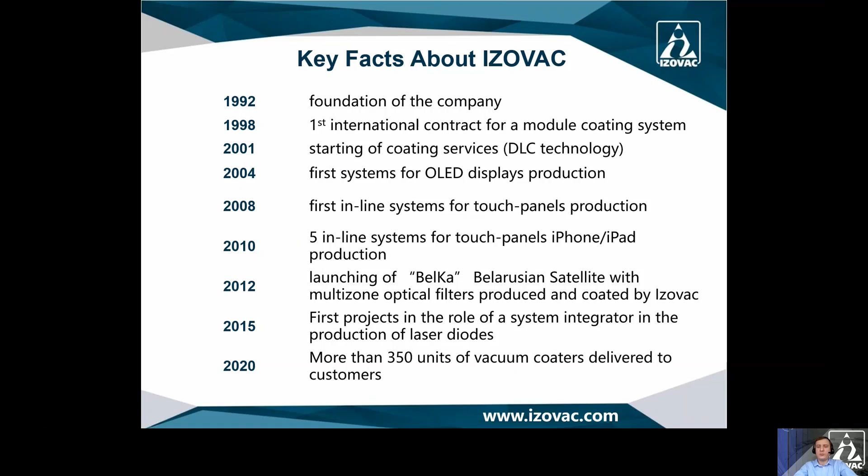Izovac was founded in 1992, has more than 30 years of history, and nowadays more than 350 units of vacuum coaters have been delivered to customers. I worked at Izovac over 20 years, specialized in ion sputtering, ion assisted deposition, ion treatment, and magnetron sputtering. My areas of knowledge are PVD and CVD coatings, R&D planning and implementation, finite elements modeling, ion sources and magnetrons design, project management, process management, production management, and product management.

We are a customer-oriented company. Technological complaints of our customers are our complaints. For the following complaints we would like to introduce our personal solutions for your application, presented here in a table. First: poor adhesion of the functional layer to the substrate.

There are no requirements for radiation exposure to the substrate. In this case, the solution will be surface ion activation.

For etching purposes, where superior surface roughness is required and it is not achieved by chemical or mechanical polishing methods, surface ion polishing will be the solution.

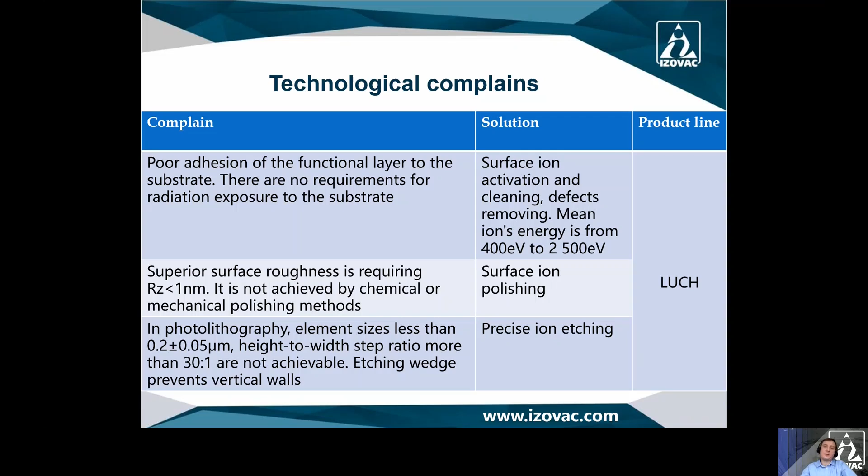In photolithography, element size less than 0.2 microns, with a height to width step ratio more than 30, are not available, and etching wedge prevents vertical walls. In this case, precise ion etching will be the solution from Izovac.

Where inclined orientation of surface roughness is required, inclined ion etching will be the solution.

For porous deposition films, low laser damage resistance, and difficulties in obtaining films with multi-component materials and chemical compounds such as ceramic, ferromagnetic, refractory, and non-conductive complex compositions, high energy ion source sputtering will be the solution.

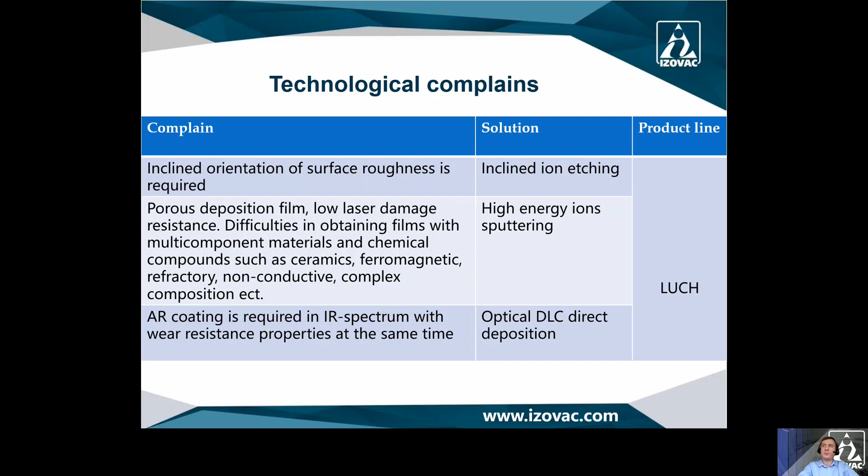The next complaint: where anti-reflecting coating is required in the infrared spectrum with wear-resistant properties at the same time, optical DLC direct deposition will be the solution here.

The ion beam source is intended for substrate precleaning and surface activation to achieve better adhesion of the following condensed thin film layers. The source could also be used for substrate surface etching, straightening, and any material sputtering, not limited to ceramic and magnetic ones. Ion beam treatment of the surface is defined as a certain effect resulting from applying ion beams of a certain character with defined energy and ion density to the target object.

Ions of the working gas are generated within crossed electrical and magnetic fields, and their acceleration and energy result from the difference of potentials within the anode-cathode gap. Ions resulting from working gas ionization, together with drifting electrons within a closed magnetic field, create an anode layer. Devices employing these physical principles are called anode layer accelerators.

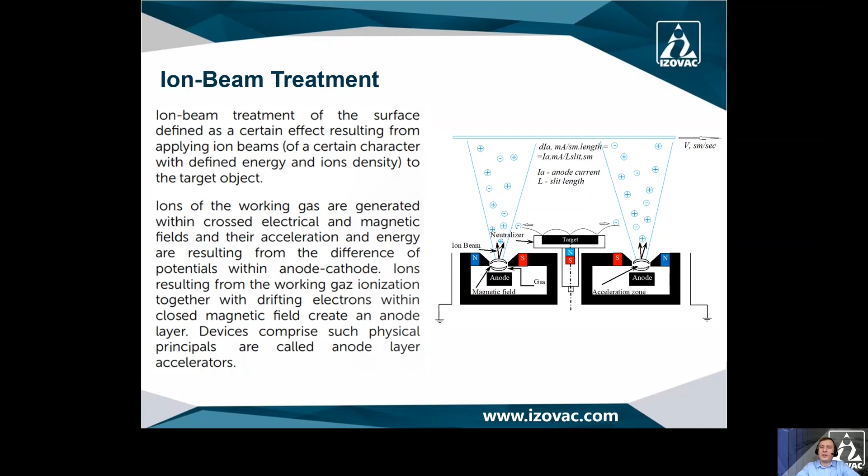Here is a small cross-section of our ion source LUCH represented in the picture, and we can see the main parameters of this source such as ion beam density, ion beam energy, and substrate speed. The main solution for surface activation will be applying our ion source LUCH.

Plasma activation can be performed using various gases. Most of these gases are used to increase the energy of the surface material. The most common way to calculate the surface free energy is through contact angle, or wetting angle. The smaller the wetting angle measured, the higher the surface energy obtained after the activation process.

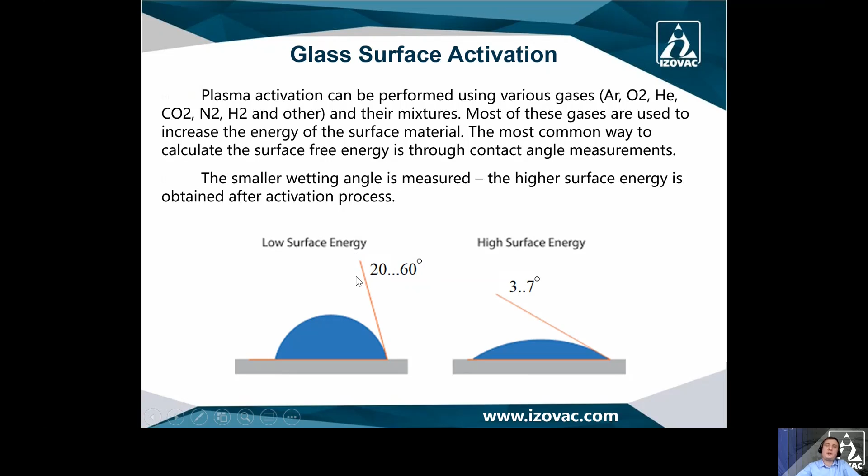We measured the wetting angle before activation and after activation. The conditions of the experiment are as follows: the substrate was moved across the linear ion source LUCH at a distance of about 10 centimeters. Ion current linear density and substrate transportation speed form the bases for ion dose calculation.

The data are represented in the table below. Oxygen was used as the main gas, and soda lime glass was used as the substrate. Here is the dose, ions received on the substrate, mean ion energy in electron volts, and operation pressure.

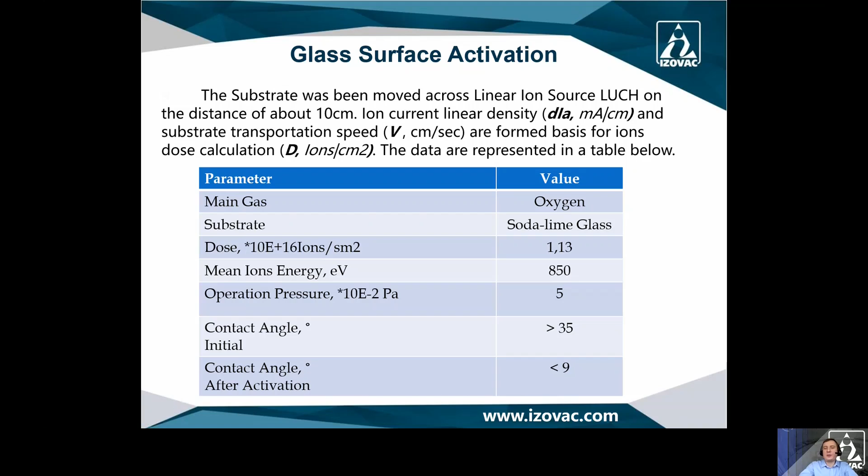Contact angle before treatment was more than 35 degrees. After activation, it decreased to less than 9 degrees. A contact angle as small as 10 degrees is acceptable for most coating applications on glass, but this result could be much improved by increasing ion energy and dose. A contact angle of less than 5 degrees could be obtained as well.

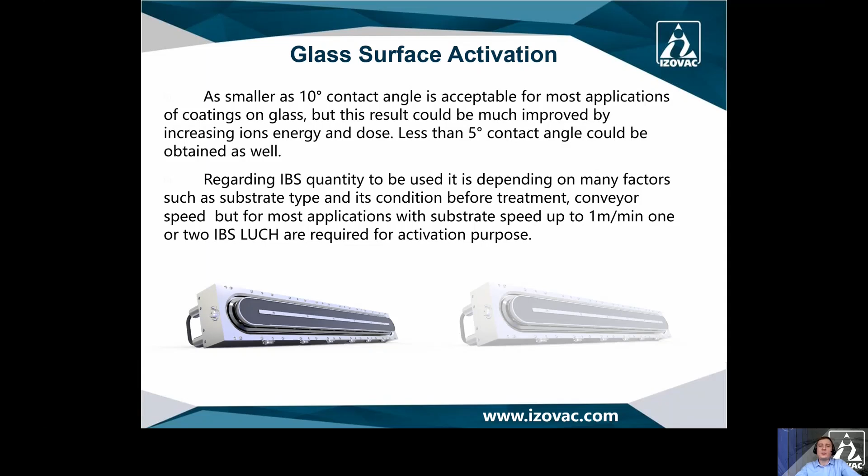Regarding the quantity of ion beam sources to be used, it depends on many factors, such as substrate type and its condition before treatment, and conveyor speed. But for most applications with substrate speed up to 1 meter per minute, 1 or 2 ion beam sources are required for the activation purpose.

Conveyor transportation systems are widely used in mass production. Glass surface during transportation in the production process gets touched by conveyor manipulators, rollers, suction cups, etc. Conveyor imprints appear on the substrate before deposition, which leads to production defects in the following functional layers, finally leading to product defects and company loss.

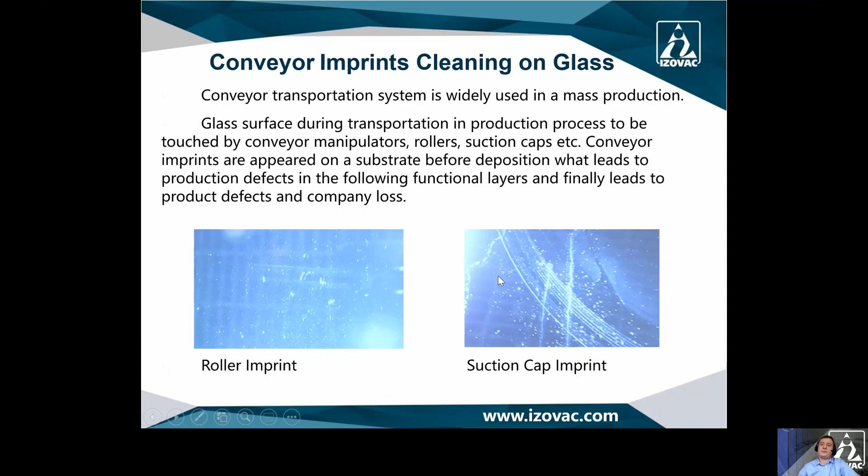Here are some photos of imprints represented, like roller imprints and suction cup imprints. We deal with them furthermore.

Condition of the test: the substrate was being moved across linear ion source LUCH at a distance of about 10 cm. Ion current linear density and substrate speed form the basis for ion dose calculation. The method of calculation of ion dose will be presented below. The test conditions are represented in a table.

Main gas is oxygen, soda lime was used as a substrate. Dose is indicated here, along with mean ion energy and operation pressure.

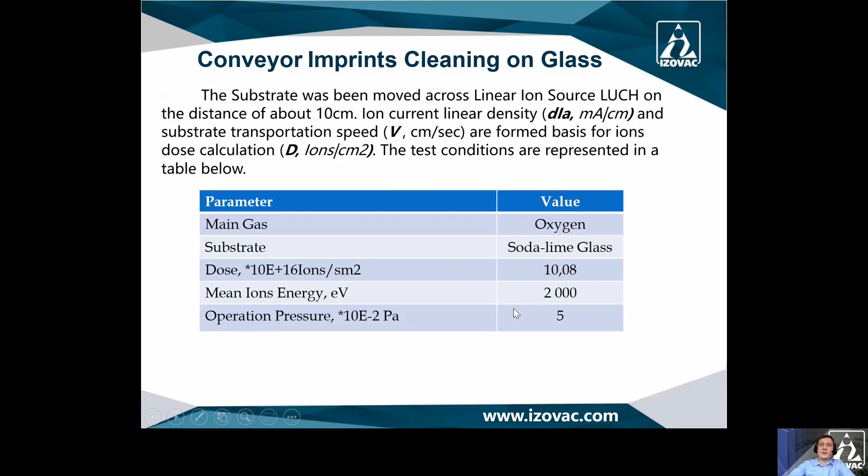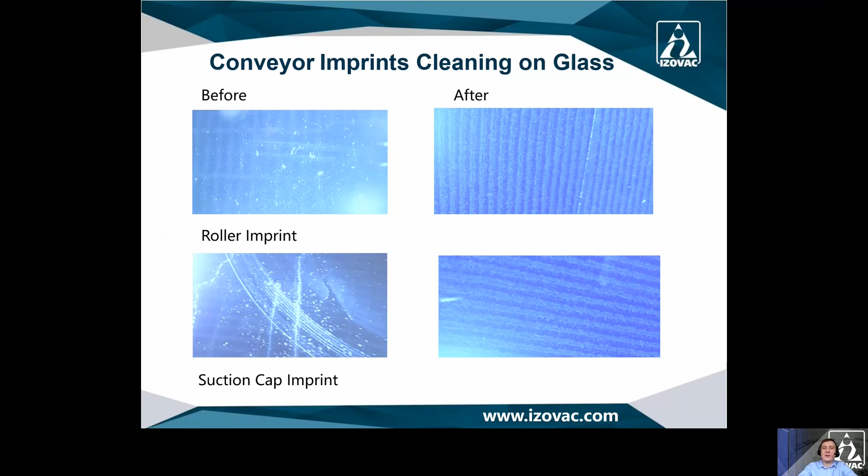What is the result? Take a look at the pictures before and after. You can see after the treatment the glass appears transparent and there are no imprints on the surface.

Conveyor imprints cleaning depends on the material of rollers, grippers and suction cups used. The maximum energy and ion current must be used to shorten the time needed to achieve the necessary ion dose.

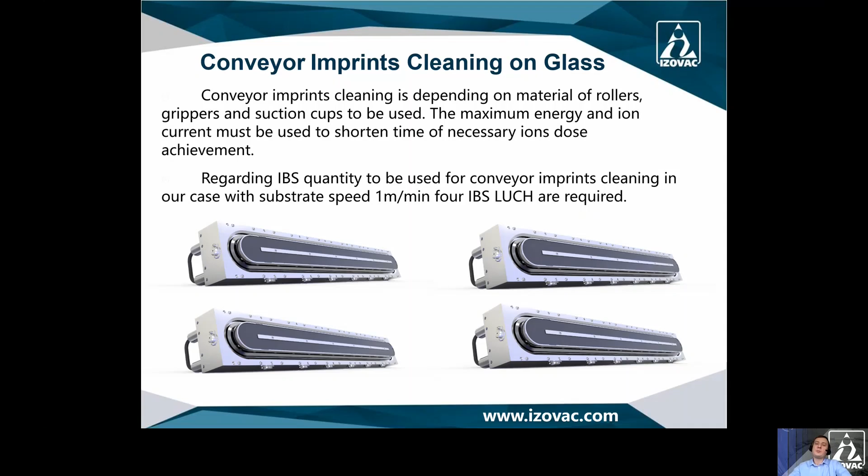Regarding the ion beam source quantity to be used for conveyor imprints cleaning, in our case with substrate speed 1 meter per minute, 4 ion beam sources LUCH are required.

Another application for ion beam source is etching. Thin aluminum foil is widely used in electrolytic capacitor mass production. Roll-to-roll coaters with foil widths more than 1 meter are put into service. Capacitor performance is directly proportional to the capacitor electrode foil surface area and its properties.

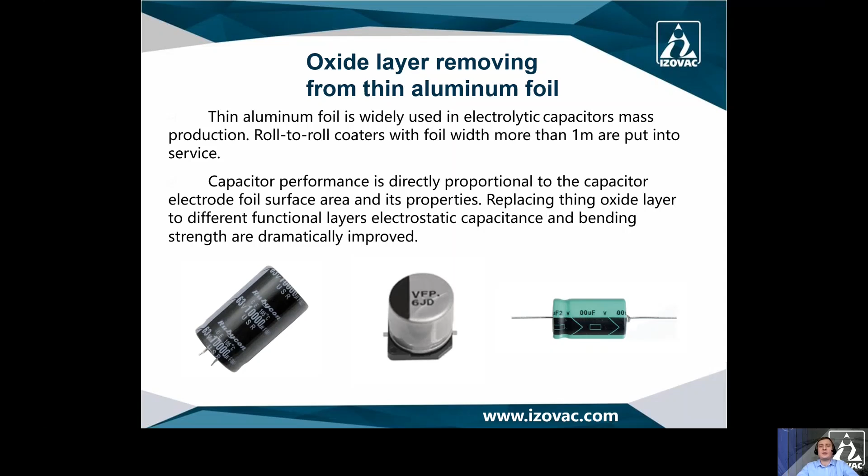Replacing the thin oxide layer with different functional layers, electrostatic capacitance and bending strength are dramatically improved.

Conditions are the same: the substrate was being moved across the linear ion source at a distance of about 10 cm. Ion current, linear density, and transportation speed formed the basis for ion dose calculation. The test conditions are represented in a table below.

Argon was used as the main gas. The substrate was thin aluminum foil, and the etching layer is aluminum oxide. The dose calculation value is indicated: mean ion energy, operation pressure, and etching rate.

When you compare etching rate with ion dose, you can find a suitable solution for your application with different materials, when you know the sputtering coefficient of your material.

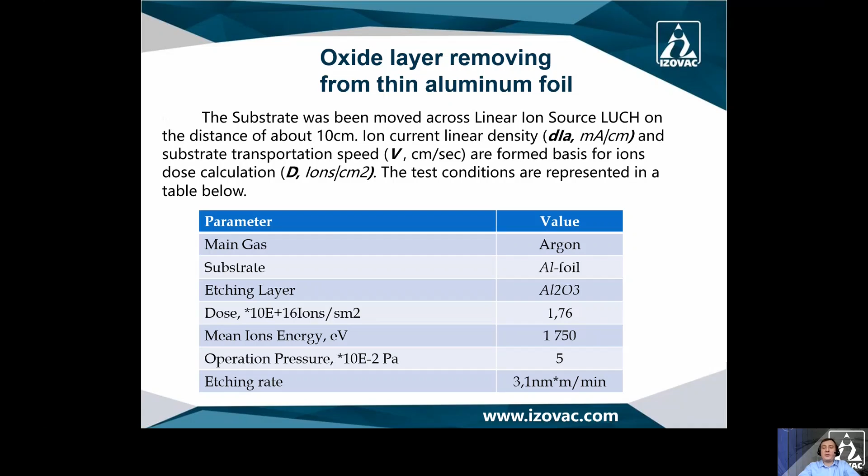Oxide layer etching time depends on thickness and foil moving speed across the ion source used during the process. The maximum allowable energy and ion current could be limited by thin foil possible overheating.

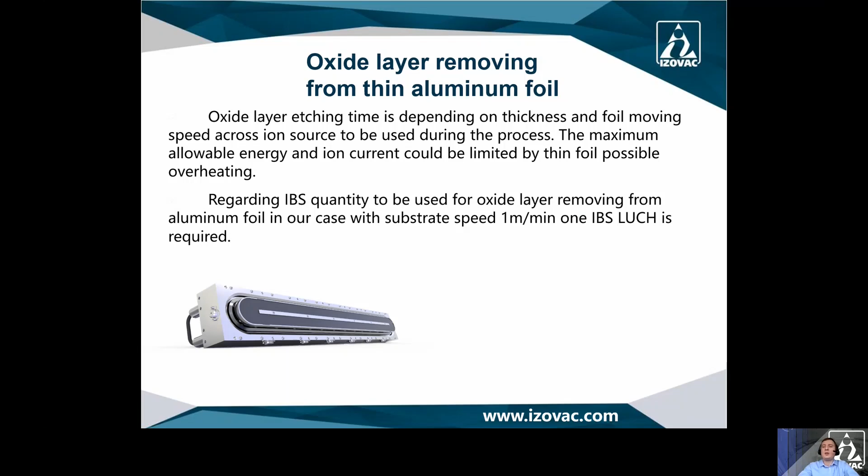Regarding IBS quantity to be used for oxide layer removal from aluminum foil, in our case with substrate speed 1 meter per minute, 1 ion source LUCH is required.

The solution for your application is right here. You cannot see it, but it exists. How well does ion beam source LUCH fit your technology? That's the question for our potential customer.

We welcome you on board of Izovac, and let's design the solution in 7 simple steps. Step 1: define substrate moving speed and treatment zone. Step 2: choose desirable ion beam current and energy. Step 3: define ion source characteristics.

Step 4: calculate high vacuum pump speed and compare with existing pump speed in your equipment. Step 5: calculate ion dose. Step 6: compare estimated result with doses given in our review. Step 7: correct and act again beginning from step 1 if you need to improve the result.

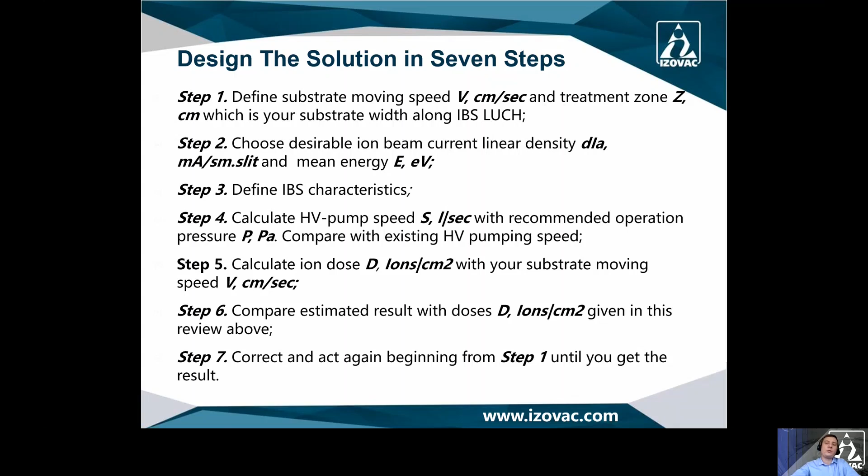Ion current and energy definition is a quite important issue during the solution design. There are 2 graphs to help you do it. One graph represents specific anode current dependence on specific flow rate. Another graph represents dependence of ion energy and ion flux density.

When we talk about mean energy, we're talking about peak energy, and more than 68% of all ions are in this region, and this inclined angle will be plus minus 15 degrees.

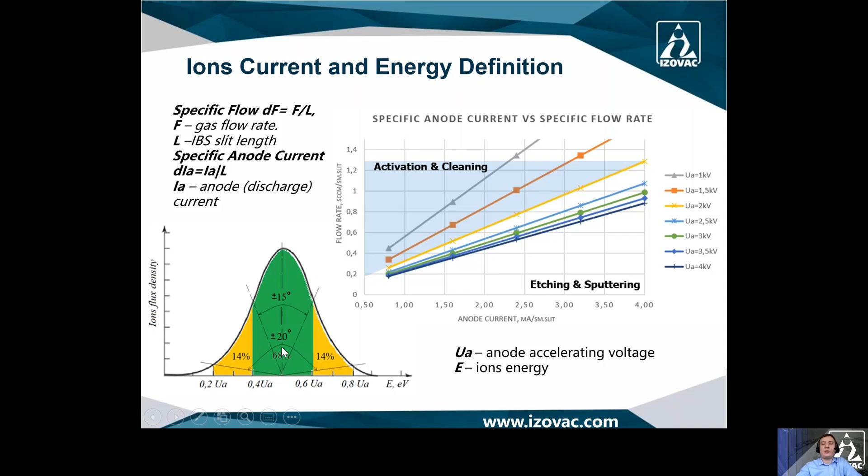Characteristics of ion beam source LUCH are calculated in this table, and this is obvious to talk about it. You just follow line by line and calculate all the parameters for ions for your ion source and exactly for your application.

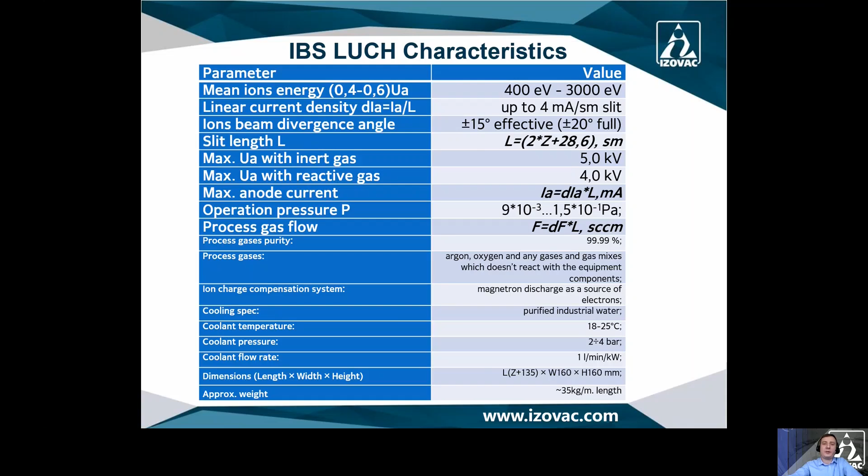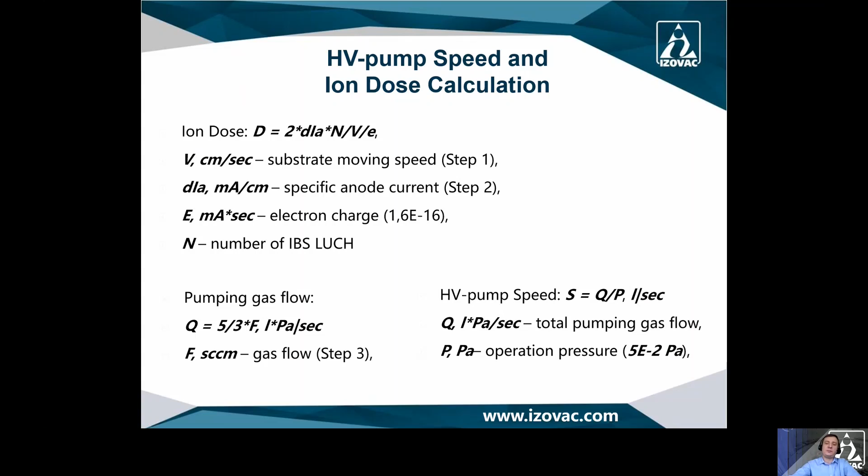There are some formulas represented for high vacuum pump speed calculation and ion dose calculation. Here is a calculation example represented, just to help you make sure that all calculations are right.

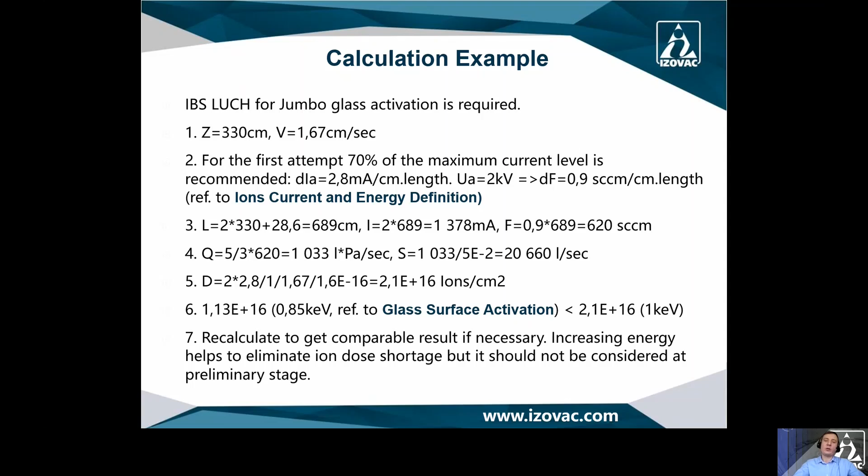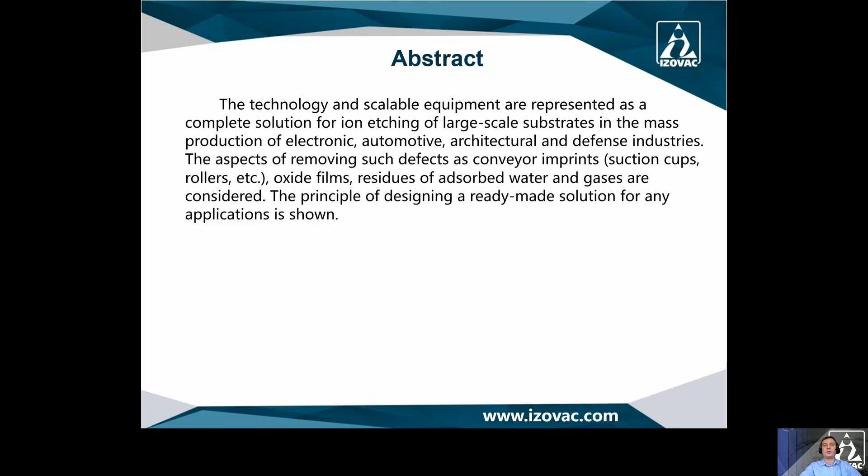The technology and scalable equipment are represented as a complete solution for ion etching of large-scale substrates in the mass production of electronic, automotive, architectural, and defense industries. The aspects of removing such defects as conveyor imprints, oxide films, residues of adsorbed water and gases are considered. The principle of designing a ready-made solution for any application is shown.